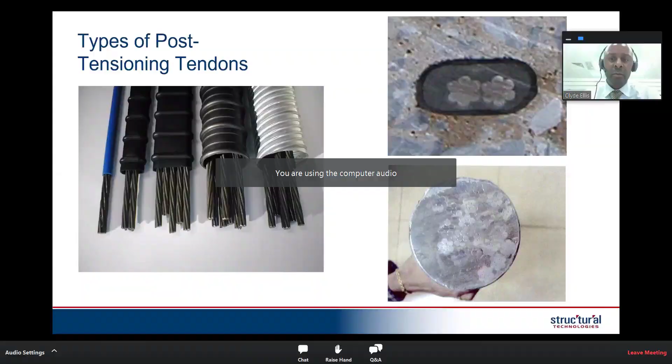In the existing concrete structure, let's talk about some of the repair strategies if your post-tensioning tendon is damaged for whatever reason. In my experience, there are a lot of reasons why your post-tensioning tendons can be damaged.

It could be as a result of impact, fire, corrosion, saw cutting - someone cuts into a slab and they didn't know it was a post-tension slab. Or you can have blowouts that occur perhaps due to green concrete while stressing. And then you can have damage as a result of chipping - someone takes a chipping hammer and chips into the slab and hits a tendon where they otherwise thought there would be no tendon.

Now, when you have this type of damage, there's really three different things that can happen. Actually, there's a fourth thing. Number one, which is not here, is that you can always do nothing, right? If you find that your system or your slab or your beam has enough residual capacity, then there's always the option of doing nothing. Now, if you find that there is a deficiency, then there's a couple of different options.

Let me walk you through those. One of them is detensioning the tendon itself, and I'll talk about how to do that just to create a safe environment where there perhaps is no deficiency. Then I'll talk a little bit about full tendon replacement. While it being very rare, I'm going to walk you through how this is done in a safe manner. And then the last one that I'll talk about is partial tendon replacement.

And you would do this because you have a tendon, for example, that's only damaged in the exterior bay due to environmental conditions, and you don't want to replace the parts of the tendon that are in good condition. So I'm going to talk to you about some of the different tools and techniques that you can use to just replace one part of a tendon if it should be damaged.

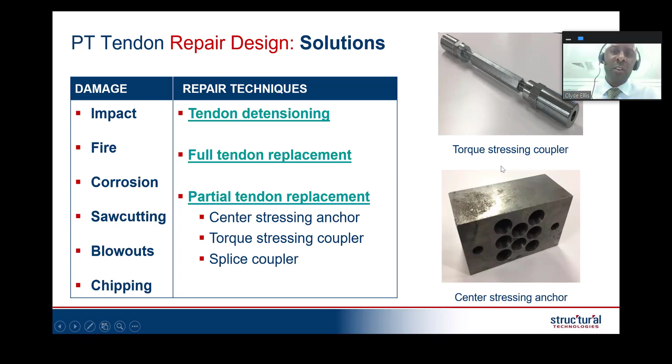And I'm going to use some of the nomenclature or some of the buzzwords from the PT industry about some of these different types of hardware - stressing couplers, torque stressing couplers, center stressing. I'm going to show you how those can be used. So first, let's talk about detensioning a post-tension tendon.

Now, the reason why I want to spend a moment on this is because for post-tensioning tendons, you have a piece of steel that's under high tension. And as a result, it could create an unsafe environment if you have a dramatic release of force.

So to detension the tendon, there's two techniques. One is that you can use a grinder - your standard grinder - and you would cut one wire at a time. This 7-wire strand has 6 smaller wires that are helically wound around the center wire. We call that the king wire. So normally you would cut all of your exterior wires first, and then you would cut the center wire. The concept behind this is that you're gradually releasing the pre-stress force, theoretically 1/7 at a time.

The other way of detensioning a tendon is to use an oxyacetylene torch. This concept is pretty straightforward. Basically, if we take high temperature heat and wave a torch over top of a bare strand, that strand will start to elongate. And while it's elongating, you're slowly reducing the pre-stress force within that tendon.

Now, there's one other point here that's important about detensioning bonded tendons, and it has to do with whether or not the system is fully grouted or not. The reason why I say this is because if you have a tendon that is partially grouted or ungrouted fully due to oversight or poor workmanship, when you go in to cut these tendons, you're going to get a dramatic release of force. And when it comes to doing a repair, you need to understand whether the strands are fully grouted.

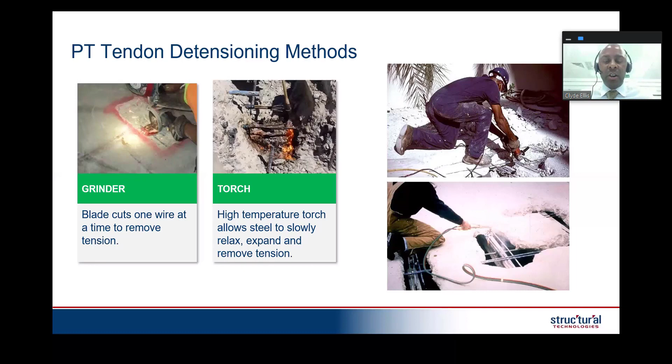So let me talk a little bit about full tendon replacement. Now, as I mentioned on the previous slide, this is something that's pretty rare. In my career, I've only done this twice. However, when it's required, it's really an extreme case, and you need to understand the different steps of doing it.

The solution here was actually to remove the damaged tendons and replace them in the same trench with new tendons. So let me walk through how you would do that. This is a very interesting case study that I wanted to share.

Number one, you would start with shoring the slab. Obviously, when you're going to be removing primary reinforcement, shoring is always going to be required as a first step. Then the next thing you do is create an open trench around the post-tensioning tendon. We know post-tensioning tendons are normally spaced about 1 meter on center, so once you use non-destructive equipment to find those tendons, it's pretty easy to find all the remaining tendons.

Once you open up the slab and chip open the trench, you would remove that corroded tendon. Then in that same space, you would replace it with a new tendon.

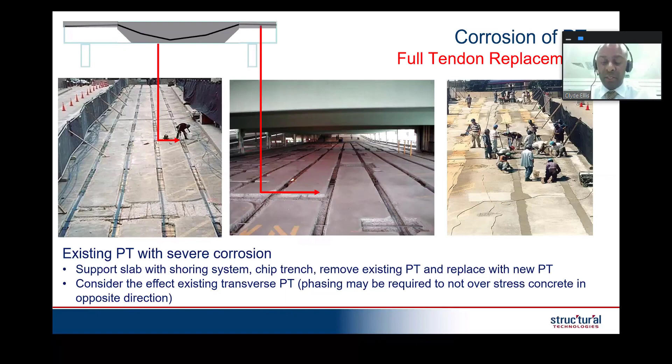Now let's talk a little bit about fire. This graphic might look familiar to most of you who've been in the region for some time. This is a tower that caught fire about 5 years back. There was damage over a 63 floor PT slab, but damage was primarily from the 7th floor to the 56th floor.

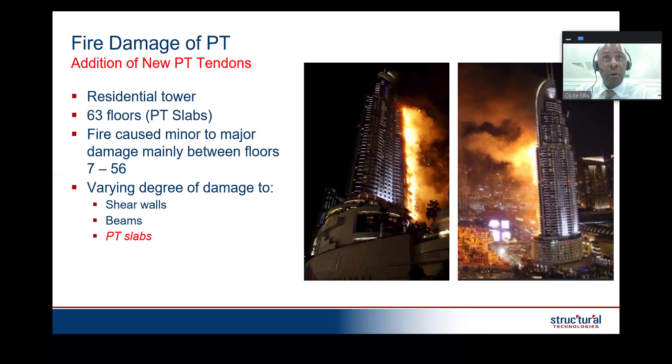There was all kinds of varying degree of damage, to walls, to beams, and to slabs. So what I want to focus on is damage to those slabs and how you would consider the remaining capacity for fire damaged PT tendons.

One thing about PT tendons that we know is that they lose strength faster than rebar. That's for two reasons: one is due to the metallurgy, but secondly, you have 6 wires spun around one single king wire, and because of this interstitial space between the wires, it has a tendency to heat up faster and lose strength prior to that of mild steel at the same temperature.

So when analyzing a fire damaged slab, you have to look at two effects: ultimate strength and serviceability. From an ultimate strength standpoint, we assumed the existing post-tensioning had zero residual capacity, because it's hard to determine exactly the extent of the damage. You probably have 50%, 25% remaining capacity, but there's really no scientific way to determine exactly what that residual capacity is. So to be conservative, when looking at ultimate strength, we assume the existing PT had zero capacity.

Now, from a serviceability standpoint, it's actually a little different. We know that the tendons affected by fire have some effect on the slab, and generally it's not zero. But one thing that's interesting about a PT slab that you have to be mindful of when designing it is that you have to look at the amount of pre-compression and uplift created from the post-tensioning tendons.

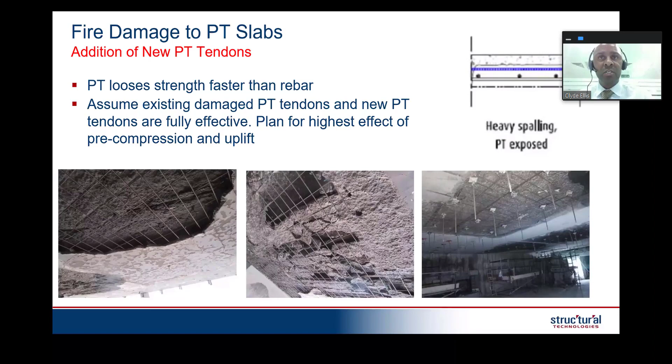This is a really important point to make note of, because in a fire damaged slab, you have to have different considerations whether you're checking strength or service.

Now I have a couple of nice graphics I wanted to share with you that I thought would be quite interesting. When you're working on a damaged slab, most of the damage from a fire is primarily focused on the soffit, since the flames go up. So in order to do a repair, you need to shore the slab. But how can you shore the slab if the fire damage area is directly above you?

So to shore the slab, here in this graphic you see a shoring system from the top of the slab, using this type of framing that has tie rods running through the slab and supporting it, with the reaction going back to the surrounding walls. This is one way of shoring the slab from the top.

Below that, you see where there's a new trench put in for the new PT. Basically, we left the fire damaged PT in place, created new trenches, and profiled the tendon in those trenches. To the far right, you have the stressing end, which we call the stress pocket in the US, or here we call it a pan box. Just below that is the dead end, the non-stressing end of the new post-tensioning tendon. This gives you a concept of how you would deal with the tendons and implement the repair.

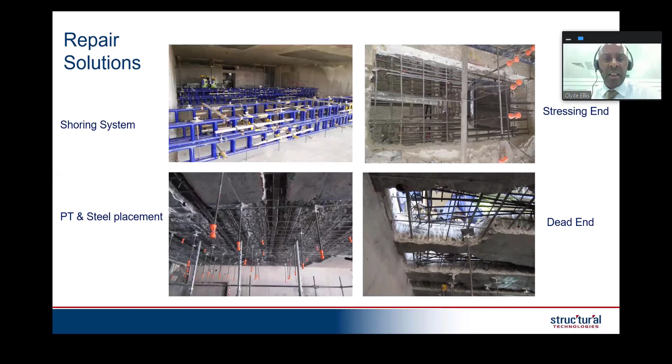Now let's talk about another technique using a torque stressing coupler.

In this graphic on the far left, you see an overhead bridge crossing a road below. This was taken on a project in Florida, South Florida, on the Florida Turnpike, if you're familiar with that. During the mid-2000s, there was a lot of construction in South Florida, with construction vehicles running up and down the turnpike. From time to time, the equipment on the flatbed trailer was taller than the maximum height allowed under the bridge, and when that happens, you get damage to the overpass, primarily focused on the fascia girder, the exterior-most element of the bridge above.

So what you see here is a bridge that's been damaged by an over height vehicle. This is an AASHTO beam, or a pre-stressed beam, and you see several wires that were broken. So the question is, what do you do? Do you replace the beam, or do you try to fix it in place? Let's talk about how you would try to fix it in place.

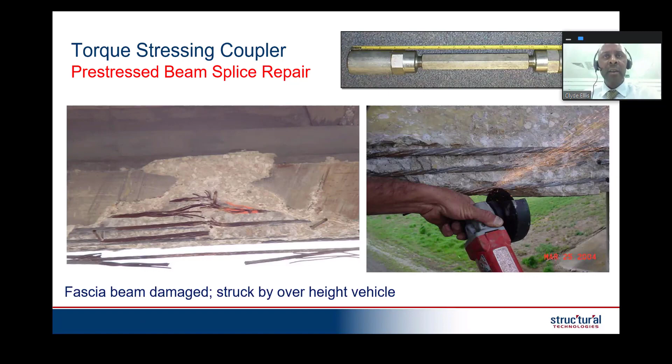The first step is any strands that are hit from the impact, we would cut those out. Why? Because when you connect onto a new piece of strand, you need to have a good piece of strand to grab hold of. You don't want it to be frayed or yielded.

If you look at the graphic on the left, this is a splice chuck. The splice chuck is added to the end of the strand where it was just cut, and then you use the torque stressing coupler. This torque stressing coupler is connected to another piece of strand on the opposite side of the repair. So imagine I have a strand of a certain length, and I cut the damaged section out — I have a little nub on the left and a little nub on the right, and between those two I'm using these two pieces of hardware.

To actually stress that assembly, you would use a torque wrench on a bar, and then torque it. What it does is take these two couplers and pull them together. So the net effect is pre-stressing the unbonded section of the damaged strand.

The other thing to consider when splicing strands like this is that if you have more than one strand damaged in a certain location, you may need to stagger these couplers because the diameter of the hardware might be a little bigger than the spacing of your pre-stressing strand. So sometimes staggering of the hardware is required.

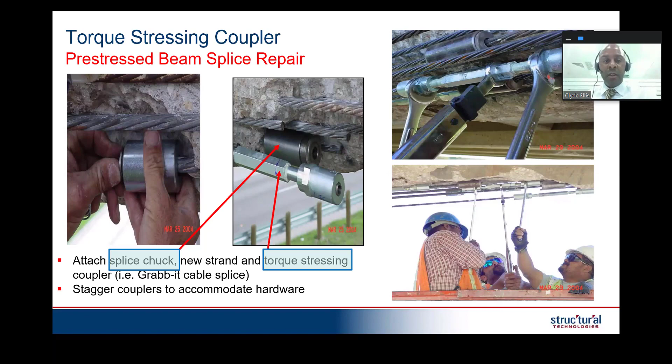Now, if you remember earlier, I talked about sometimes you have damage to a tendon but it only happens in the exterior bay. You may ask why that would happen. Well, if you have a post-tension slab that's partially below grade, depending on the protection details at the end anchorage, you may have infiltration of water or contaminants that lead to corrosion. The graphic here is an example of a slab where contaminants have gotten into the post-tensioning tendon and corrosion has started to take place.

And this corrosion is sort of like cancer, it kind of spreads over time. So if this should happen, there's a couple ways to deal with it, but what I'm going to be talking about is partial tendon replacement.

So what you would do, step one, is lock off the post-tensioning tendon. I'm going to describe how you do that and what that term is. But the basic concept, for the sake of this slide, is that we're going to create an anchor at a portion of the tendon that is otherwise unaffected.

That's step one. The second step, and this graphic at the top right is a really good photo of it, is that I would chip open the slab and remove those damaged tendons. In this graphic, you see it's full depth from end to end. Then I would put in a new post-tensioning tendon and pour that back. Now, prior to pouring it back, I would have to put in a coupler.

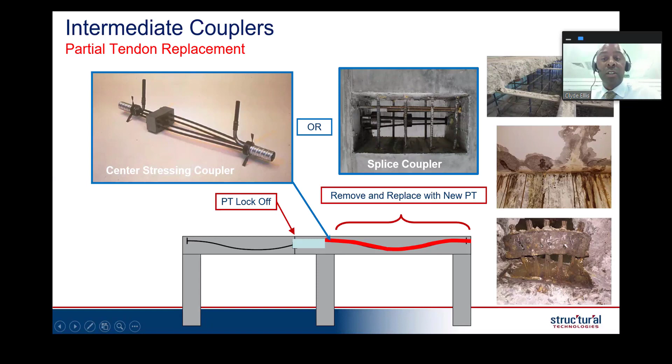So when it comes to damaging tendons, sometimes this damage is localized and it may not require any remedial action. Concrete screws, cutting, coring, chipping - sometimes the effect is minimal and no repair is required. And in order for that to be the case, the tendon has to be fully grouted. As I get further into this, I'm going to talk about whether the tendon is grouted or not, because if it is, your repair could be slightly modified.

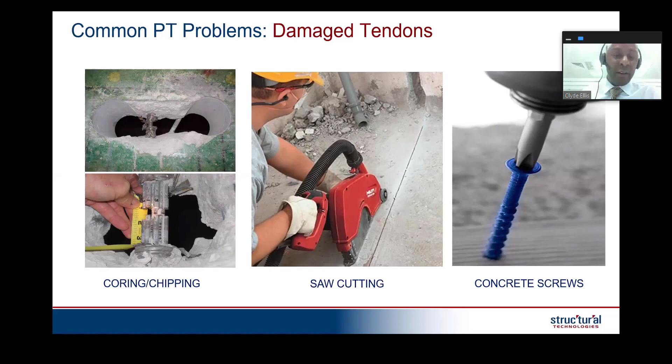Now, another piece of damage that can happen on a PT slab - and I'd say this typically happens when it comes to bonded post-tensioning during new construction, rarely over time - is what we call tendon blowouts. These blowouts occur at the anchor itself. A blowout can happen for a couple of different reasons: you could have bursting reinforcement that's either undersized or mislocated, you can also have low compressive strength, or you may have poor concrete consolidation in the anchor itself.

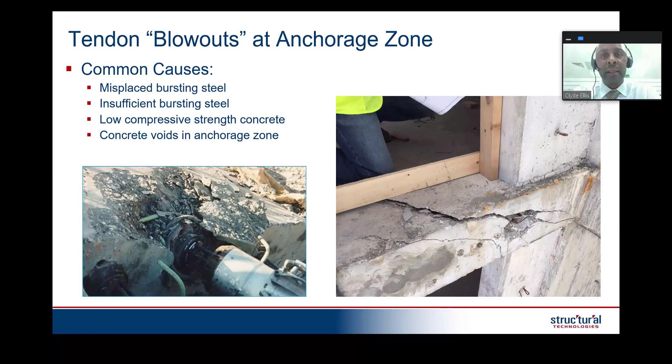In my experience, what I've seen the most is actually low concrete compressive strength. That seems to be - if I had to rank these four reasons - I would say low strength probably leads all the other remaining reasons for a blowout.

Now, if you have a blowout, what do you do? You're not going to demo your slab and start over, you're going to have a local repair. So typically you would come in and de-stress the tendon because there could be some residual pre-stress force - remember, you would use either a saw or a torch to release that pre-stressing. And then you would chip open the concrete and place new hardware.

You place your bursting steel, you place any grout accessories that are required, bearing plate, anchor head, etc. And then you would pour back concrete with a high strength repair mortar. Typically you want to have a high early strength on this because when it comes to repairs, sometimes it affects the progress of the remaining construction schedule. So high early strength is important.

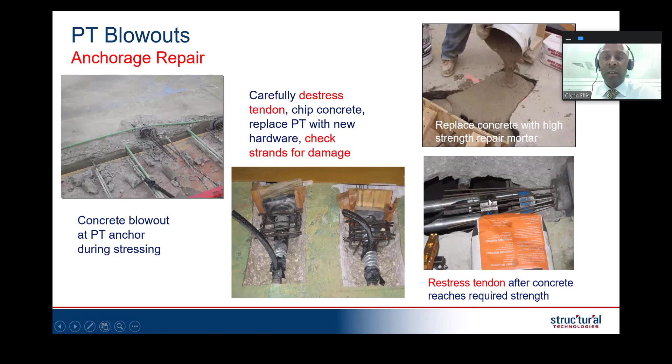And then after the concrete hardens, you would stress these tendons using either a monostrand or a multi-strand hydraulic jack. So next I wanted to shift a little bit into modifying a slab for various reasons, but I'm going to focus primarily on openings and penetrations that weren't planned from the original construction.

When it comes to modifying slabs, I like to break the openings into two categories: small openings, which in my opinion is 2 feet by 2 feet or smaller—in metric, maybe 600mm or less—or larger openings. There are a lot of different reasons for having these different openings.

It could be for mechanical, electrical, plumbing, staircases, or elevator shafts for larger openings. The point I want to make is that you can always modify a post-tension slab, whether the tendons are grouted or ungrouted. There's always a way to do it. You just have to have a contractor with repair experience, and understand the behavior of your slab.

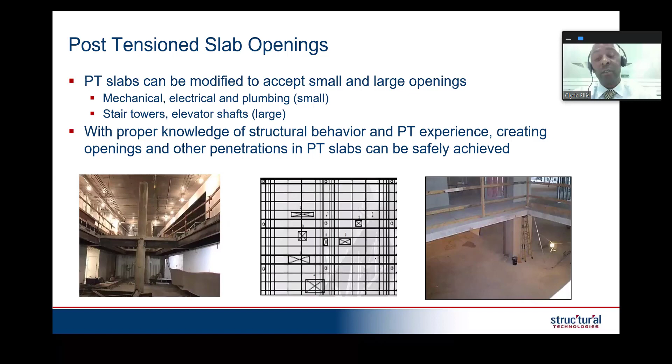So let's talk about how you deal with small openings and how you accommodate them. The first step is to use non-destructive testing equipment to find the tendons in the concrete slab. That's typically done either using ground penetration radar equipment, which I'll talk about in the coming section, or you can use an X-ray to identify where those tendons are.

Once you find those tendons, in many cases you can shift your openings to the left or right just enough to avoid the PT tendon. This graphic in the center here is an example of that. The blue lines represent the tendon, and you would just shift your core a little to the left or right to avoid those tendons. So for small openings, I would say this would be the preferred technique.

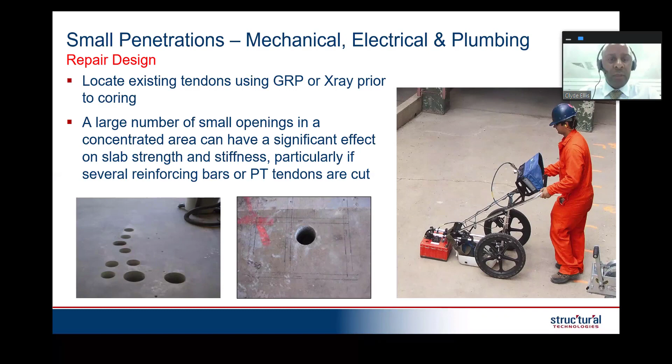Now, if you hit the tendon, then you need to look at the residual effect in the slab, and I'll talk more about how you would do that. So if you hit a tendon, or if you have a lot of tendons affected by large openings, there's a couple things to consider.

One is the possibility of shifting it. When I say shifting it, I normally like to think of putting openings in the middle third of the slab. Normally the middle third of the slab is going to be the area with the least amount of impact to the overall structure. As that opening gets closer to your column strip or columns, you have to consider other effects—maybe not bending, but you may also have to consider punching. So shifting them is always step number one.

Step number two is checking serviceability requirements. After you lock off these tendons around the opening, you would check your service requirements, and then check the remaining capacity of your slab. What's interesting about this concept is that if you create large openings, your adjacent bay actually becomes an end bay. And we know from a design standpoint that the bending moment will then increase, so that also has to be considered.

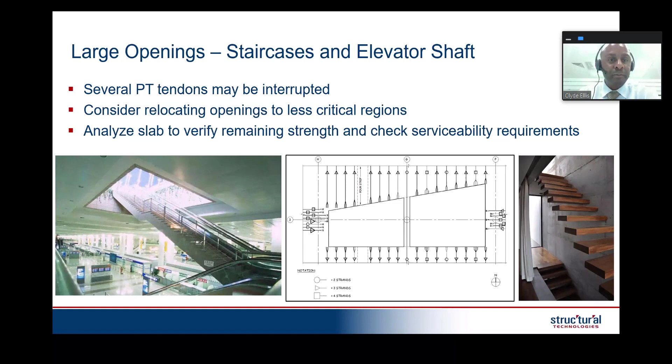The strengthening isn't always required around the opening. In some cases, it may actually be the backspan, which goes from a continuous span to an end span, and the moment increases. Now I've talked a little about locking off tendons, let me get into more detail about how you do it and why you would need to.

Typically, if you're creating large openings, you may want to lock off the post-tensioning tendons around that opening. The reason I say 'may' is because if that tendon is fully grouted, then theoretically the pre-stress strand will redevelop in that slab, and you only have to deal with the localized effect. However, if you have uncertainty about the quality of grout, then tendon lock-off may be required.

Now, how do you do that? First, you would chip into the slab to create an opening and expose your PT tendon. Then you would peel back the duct, similar to this second graphic here. Then you would use a chisel to remove the grout off the strand. The net effect is you want bare strands, which you clean with a wire brush, as shown in this graphic in the middle.

Next, you would mix a 2-part epoxy mortar and fill that pocket with the epoxy mortar. Once it hardens, you've locked off the tendon.

Let me explain what's mechanically happening here when we say lock off. The epoxy anchor that's created has load being transferred due to side adhesion, but it's also being transferred through end bearing. The combination of these two creates an anchorage, or otherwise a lock-off, of the post-tensioning tendon.

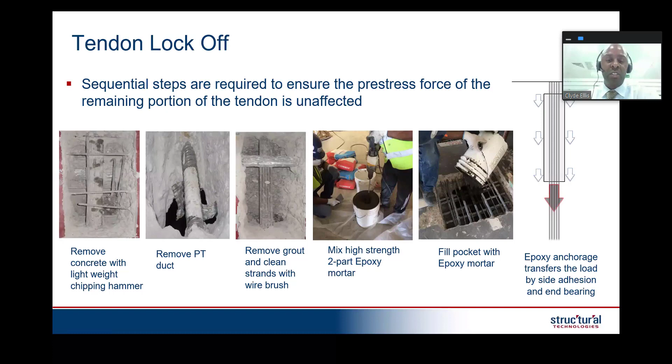So now I want to talk a little bit about some of the tools to assess the PT slab. And whenever you do an investigation of a slab, there are really 3 basic steps that you would take.

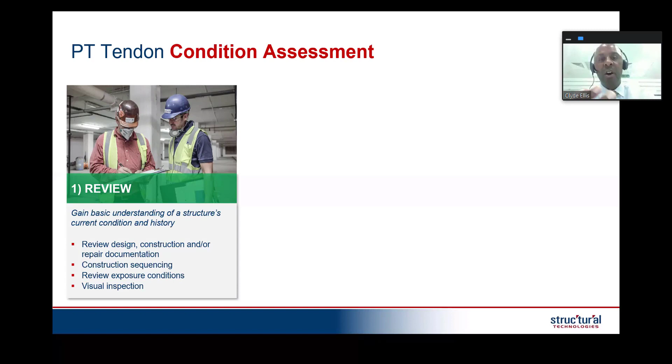First is that you would review all relevant documents. We always say that having as-built drawings is great to have, along with stressing records, grouting logs, and doing visual inspection. All of these would be done in what I call the upfront initial review.

Now, the second thing of doing an assessment is it might require some field testing. I'll walk you through some of the tools that you can use to understand the performance of the PT.

And then lastly could be laboratory testing. In my experience, laboratory testing is quite rare. However, for special cases, you may need to take coupons of your strand and actually send it to a laboratory, either to do chemical testing, or you may have to do some tension pull tests.

Now, before I get into the different techniques, let me explain why you would do this assessment. In many cases, when an owner buys an existing building, one of the things that always happens is he hires a consultant, like many of you are on the call, and says, I want to understand the condition of my structure. And the default action is structural assessment, understanding existing conditions, the load path, load diagrams, and checking members to ensure they're adequately designed for those loads.

But one thing that's often overlooked in my experience is understanding the durability side of your structure. I'll talk a little bit about ways you can do a durability check, but focus on the post-tensioning tendon.

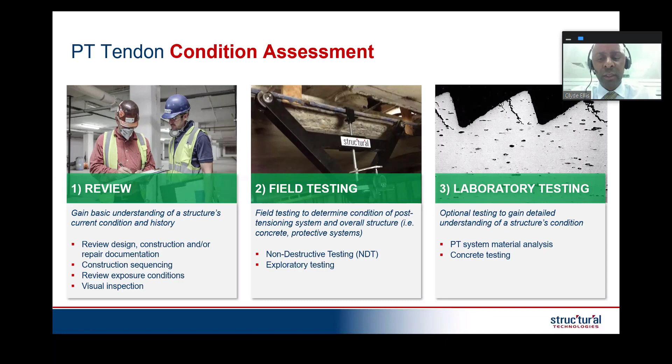So if you're doing a durability check on your post-tensioning tendon, you start with the visual inspection. The first thing that we always do is go to areas where you would expect distress, having full knowledge of how a post-tensioning system behaves.

So one, you would look at the high and low points. The reason I say that is because that is where the contaminants have the shortest distance to get to the pre-stressing strand. I would also look at the anchorage zones.

If I have a pour back that's improperly done, or if I have poor detailing at the perimeter of the building, this could be an area of distress. Any part that's below grade, I would always check there because of the possibility of contaminants coming through or leaching through the wall.

I would look for cracks, spalls, efflorescence, and rust staining. Anywhere that there's a water feature above the building, I would look directly below that. That's a good place where there could be some challenges if the waterproofing has failed.

If you have exposed strands or ducts or tendon failures, or even previous repairs, whenever we're doing a visual inspection, it's really easy to just look at those areas that were patched before. If it was not a good patch, then that tendon in that patch could be in serious distress.

And then the last part is excessive deflection. So these are things that I would do in step one when I'm doing a visual inspection of a structure, just to kind of understand the health of the post-tensioning tendon.

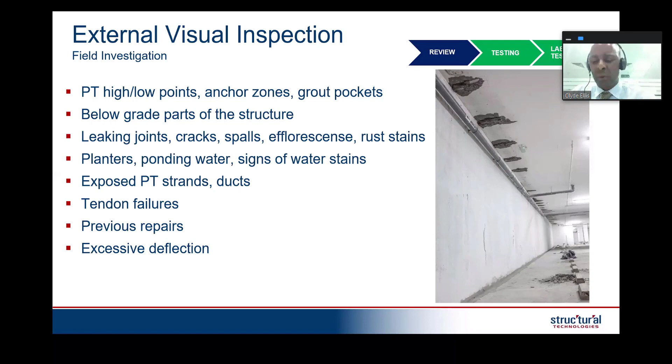Now, when I prepared this list, I would say the focus on this part of the industry really came about probably in the last 10 years. This list, we populated based on existing technology and new technology.

Now, when it comes to doing an investigation, I just want to make one caveat here. You would never use all of these techniques. Never in my career have I used all these techniques. What you have to do is understand the pros and cons of each technique.

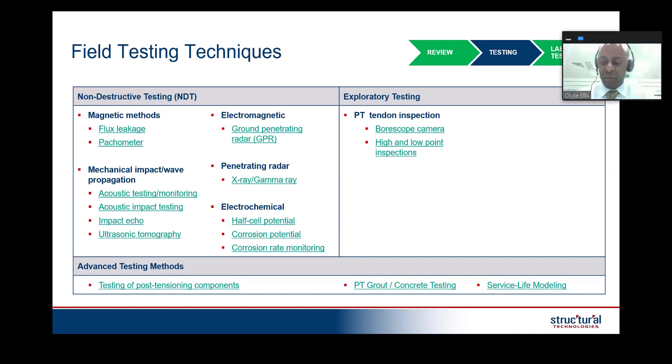Because there is no single non-destructive test equipment that will give you the full picture. It does not exist. So what you have to do is pick and choose different techniques to help you understand the health of your structure. Okay, so let me walk you through some of the techniques that I've seen used in my experience.

The first technique is borescope camera inspection. I always start with this one because it lets you visually see the condition of the strand and the quality of the grout, or the presence or lack of grout. To perform this inspection, you drill a small hole, about 25 mm max bit size, using a special bit with a depth indicator on the drill. You combine your as-built drawings, set the depth indicator, and drill a small hole into the slab, wall, or beam.

Next, you insert a borescope camera, the same type used in the medical field, just much smaller there. The concept is the same: a tiny camera on the end of a wand with articulating capability, able to spin left, right, upside down, and around.

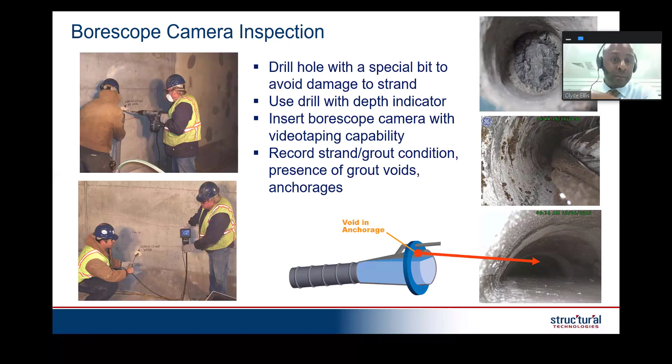The next technique is X-ray. I really like X-ray for this same reason: it tells you exactly what's in the slab, again with no interpretation required. However, it comes with a few limitations.

Number one, an X-ray requires a radioactive isotope. Imagine going into an X-ray room at a hospital, turning on the switch, and just standing there for hours—that's a bad idea. So you have to maintain a certain distance from the radioactive isotope when exposing it to the film. There's a safety issue. It also uses bulky equipment, probably about the size of a small refrigerator you might have had in a college dorm.

On top of that, the viewing area is limited to the size of the film. In my experience, I've seen maybe 600 mm by 600 mm as the maximum film size in a single shot. So if you need to X-ray a large area, it could take days, even weeks, to get the full picture using this technique.

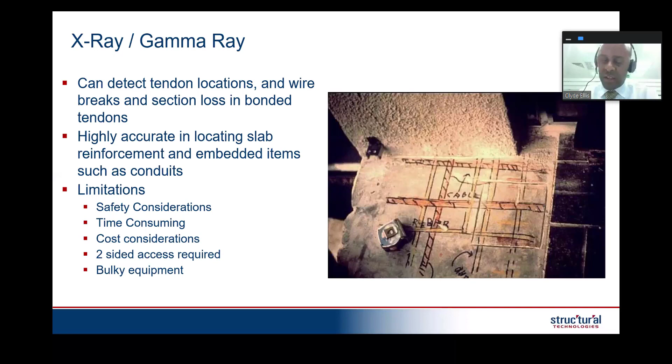Another technology that's come about in the last 5 years or so is magnetic flux leakage. I actually had a professor from graduate school approach me about this technology—it's really good from a science perspective, but it has some limitations. Let me walk you through how it's used.

It's really cool technology. We know pre-stressing strand, the steel wires, is ferromagnetic material. That means I can magnetize the steel to saturation. If you remember physics, when you magnetize steel it creates a magnetic field, which we call magnetic flux. The basic concept is that the magnetic flux is proportional to the cross-sectional area of the steel.

So what does that mean? If I take a sensor and pass it across a tendon that's fully magnetized, I can use that sensor to measure the change in the magnetic field. If there's a drop in the magnetic field, that tells me there's a point of smaller cross-section at that location, signifying a defect. This technology is really cool—I've seen it used on bridges and in some building applications, but it all comes down to creating a magnetic field, magnetizing the strand, and checking for a change in that field.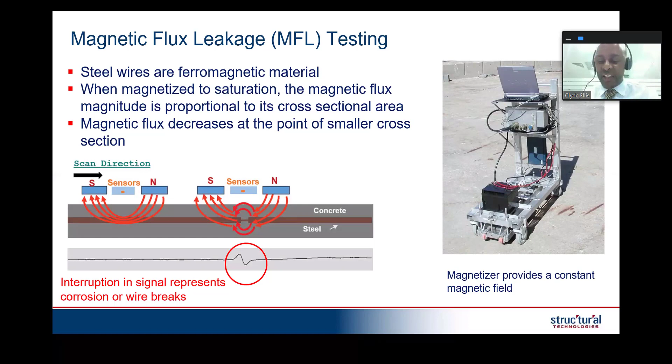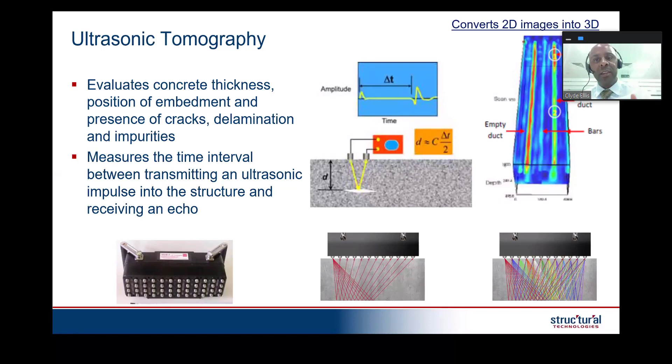This graphic on the right shows a tendon that's fully grouted, represented by green, and the red represents a void within that specific tendon. The reason you'd do this is because you're trying to find a quick, non-destructive way of finding problems without making Swiss cheese out of your slab by drilling a bunch of holes or doing a lot of chipping.

Now, the last technique I wanted to talk about is acoustic monitoring, which is a really interesting technology. If you're like me in graduate school, you work with a lot of different sensors, like displacement transducers, string pots, rotation meters, accelerometers, and so forth. I remember this from my grad school days, and I wanted to show you how this accelerometer can be used to detect wire breaks.

For wire breaks, if a strand is pulled under tension, there's a lot of energy stored in that strand. If a wire breaks, or the whole 7-wire strand breaks, you release a lot of stored energy. When that happens, two things happen to that energy: one, it's reabsorbed into the surrounding concrete, or two, it creates an acoustical sound or vibration into the slab. So if you have accelerometers on your slab in strategic locations, they can actually detect the acoustic waves in the form of surface vibrations, and it can help us triangulate exactly where the wire break occurred.

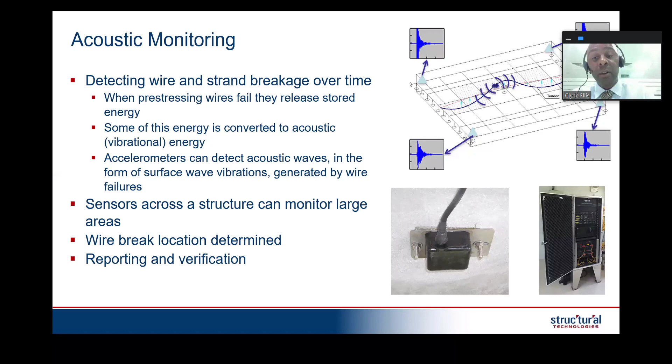It's a really cool technology. I've seen this used on stay cable bridges, on historic buildings, and for long-term owners who have had problems and want to get a handle on the possibility of future problems before it becomes a safety hazard.

Okay, so the last topic I wanted to talk about is PT grouting defects. I want to talk a little bit about how it happens, and then what do you do if it happens. To introduce this topic, first I want to talk about how you grout a post-tensioning tendon, and the mix design. Typically, the mix design consists of cement and water, with a water-to-cement ratio normally around 0.45.

Normally, for a post-tensioning tendon, you'd pump grout from one end of the tendon to the other. On my screen, this blue line represents a draped tendon. When you do pressure grouting, you have to have an inlet and an outlet, and depending on the amount of drape, you may have high point vents. If this were a slab, I would mix grout and start injecting here, and that grout would go down to the bottom, then up to the top at the high point.

When that grout reaches the high point, it rushes down to the bottom of the next span, and then it slowly starts to backfill, backfilling to the left, backfilling, backfilling. What happens here is that air gets trapped within that duct about 1 meter downstream of the high point. We've seen this in a lot of different cases.

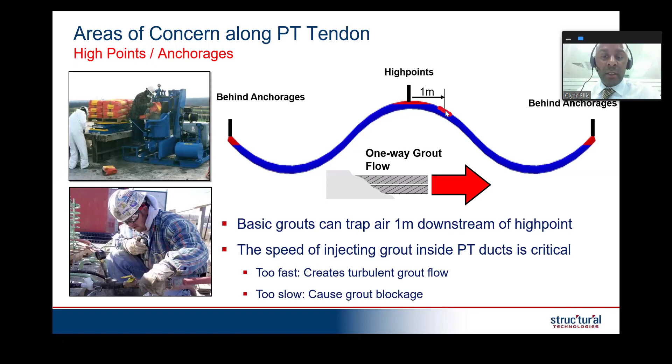The other thing I want to talk about that leads to trapped air or voids is the grout material actually segregating, and let me explain how that may happen. If you see this graphic, this is an inclined tube test done in a laboratory. This is a draped tendon, basically simulating a tendon that has a low point on the slab and a high point at the top of the tube. I'd say this has quite a bit of drape, but it makes the point I'm trying to highlight here. What we found is that for basic grouts, the grout material has a tendency to segregate. What I mean by segregate, it starts to return back to its separate constituents, so the cement can separate from any admixtures. This graphic you see on the top right is an example of segregation.

This murky water you see at the top, this is what we call bleed water. How does bleed water happen, where does that come from? Well, just imagine a vertical column of grout. We know that there's head pressure, the taller the column, the more head pressure. What we have found is that the grout is heavier density, and it's actually pushing down on itself, and the bleed water is rising to the top. So this is how that segregation happens. It's not because they didn't mix it properly, it's not because they put too much admixtures. It's actually that the head pressure causes the grout to segregate, and bleed water is left at the top.

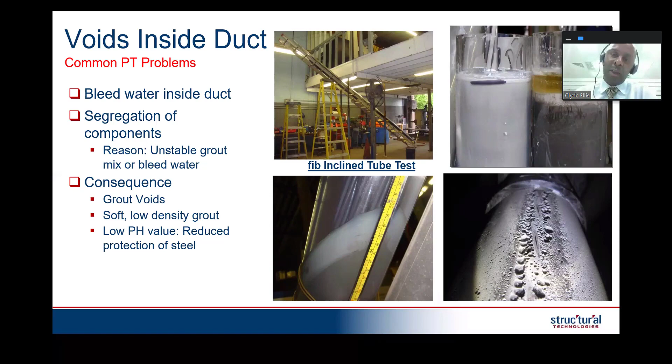So the point I'm trying to make here is that bleed water, which can remain in a duct or reabsorb into the grout, can lead to voids inside the duct or poor quality grout that can create a path for contaminants to get to your pre-stressing steel. And we know when contaminants get to our steel, what happens? We have corrosion, and that leads to other problems.

Let me walk you through a quick case study to share this with you, because when I talk to consultants about this issue, they say, okay Clyde, that's a field problem, I'm not a field guy, I'm going to hire the PT guy, he's going to do a good job, finish, no problem. I say, okay, we can assume that works.

However, if you're asked by the owner, or if you recommend to the owner, hey, you're buying this building, you're doing a tenant conversion, or you're buying an abandoned building and putting another 20 floors on top, hey Mr. Owner, does it make sense to do a durability check on your slab that could include PT investigation? And if the answer is yes, let me share with you what would be a process you can use if that's your task.

So this case study is a residential tower on Al Reem Island. The B2 level is a raft slab, conventional rebar, which is pretty common. All of the remaining floors are post-tension slabs. I want to highlight that parts of the slab are below grade, which is the root cause to the problems I'm going to share with you.

But I'm going to focus primarily on what a consultant does, how you start, where you go. Some of the observations in this particular structure is that there were cracks in the slab due to restraint, there was spalling, PT in different areas was either exposed or highly corroded. We actually even saw some empty ducts, which was quite a surprise.

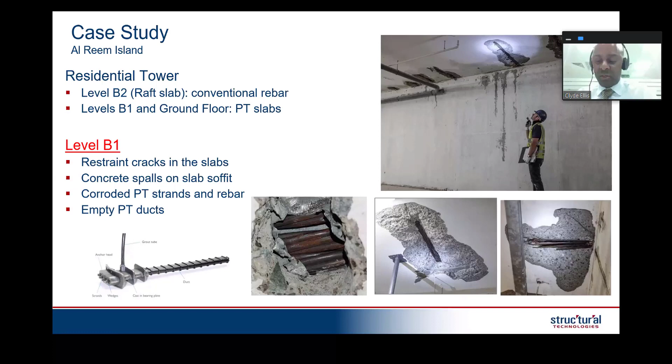So, investigation. You're the consultant on the job, where do you start? As I pointed out earlier, tier one, or step one, is always understanding the structure, doing a visual, and then combined with that you do some non-destructive testing. What's the non-destructive testing? That's hammer sounding, right? We can use acoustical hammer sounding to find areas of delamination. Age-old technology, been around forever.

You can also use ultrasonic pulse velocity, which I showed you earlier, to help detect areas where there's medium to large size voids. I wanted to highlight that small voids with that technology is one of the limitations. However, for medium to large, ultrasonic pulse velocity is a good technique. So that's step one, and you've done that.

Okay, so you collect your data, and then you say, hey, there's some other areas I want to go a little bit deeper. This is just preliminary, let me go a little bit deeper to understand really what's the health of my structure. So tier two is when you would do what I call semi-destructive testing or minimally invasive testing. So what would you do?

GPR is a really good tool, right, can help us identify defects within the slab. The borescope camera inspection, to me, it's a go-to technique. It's inexpensive and it tells you a lot of information, and you don't have to be a scientist to interpret the results. You could take some cores, right? You can also do some chemical analysis of the cores and the PT grout.

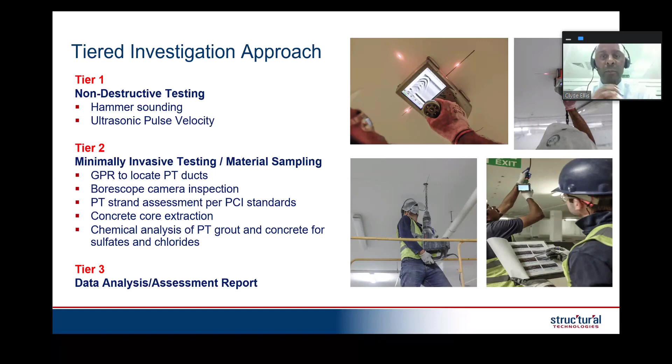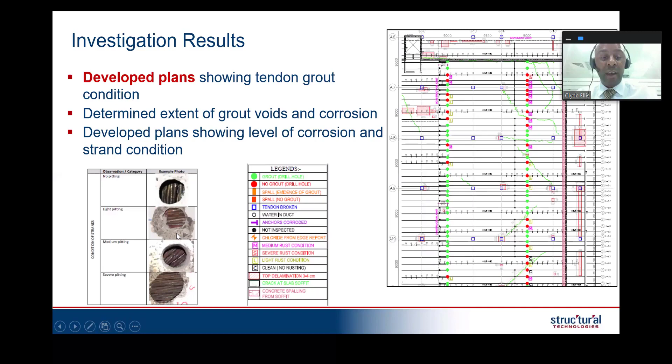This is a really good document to prepare for a tender package because it paints a clear picture to the contractor of what the problems are and the extent of the problems. Additionally, in your report, you would have a summary of your visual findings, shown in the graphic on the far left-hand side. That would be your report.

But when it comes to repair, I always like to explain a little bit further for consultants, because if you're going to have a good contractor, you should have some peripheral knowledge of what's going on, what he does, and how he's fixing it. Just as a logic, sound check, if you will.

So if you have severe corrosion, remember earlier I said you can do partial tendon replacement - chipping open the trench, taking out the bad PT, putting in the new one, finished. However, another technique I've seen used is to lock it off just like explained before, but then convert that slab into a conventionally reinforced slab. That's always an option. In some cases it may be easier because you don't have to consider the effect of stressing a tendon and having proper access to stress it. So think of this as a technique: I can take out the bad tendon and simply replace it with a mild steel reinforced concrete slab.

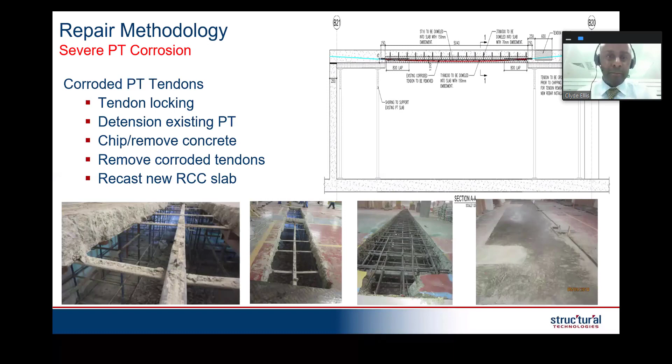Now, when it comes to grouting voids, there's a couple of different techniques I wanted to share with you, just to give you a little bit more knowledge into the contractor world. There's a couple of different techniques for filling voids. I would say primarily there's two, just to make it plain.

One is pressure grouting. What's pressure grouting? The same technique that's used to grout the tendons from day one. You have an inlet, you have an outlet, you pump material from A, it comes out at B. You keep pumping until the material coming out of B is smooth, free-flowing, without any lumps. Shut off your valves, finished.

But there's another technique called vacuum-assisted grouting, and I'm going to talk about that on the next slide. Whenever either of these methods are used, there are standards that I want to share with you that are a good resource for having a deeper understanding into these techniques and how they may be applied.

The Post-Tensioning Institute, based out of the U.S., has a really good document on grouting, and I would recommend it as a reference. In all these graphics that you see here, this shows you different stages of remedial grouting, where you're installing new grout ports, mixing equipment, connecting your hoses, and making sure you have good flow out the other hoses.

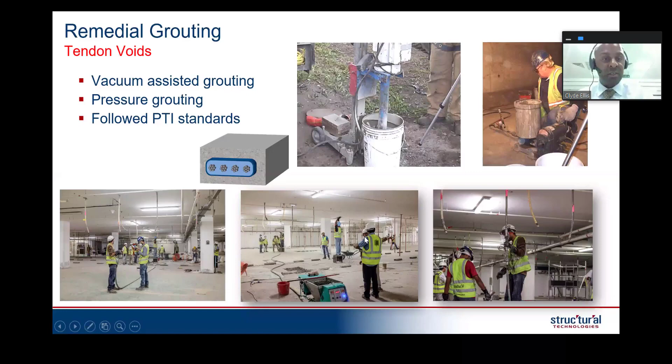Now I want to talk just briefly - this is my second to last slide, just to give you a sense of a time check here. Remedial grouting using the vacuum-assisted grouting technique. Let me explain why I would want to use a vacuum to help me fill a void inside of a duct cast in concrete.

Number one, these voids can be quite small. Imagine a round duct, let's say 75mm or 100mm inside of a beam. A flat duct, you're talking about 1 inch by 3 inch, so that's 25 by 75mm. So a flat duct, the void would be small - the duct is already small. So if you have voids inside these ducts, sometimes it's difficult to push new grout material through the small space inside the duct, and you could build a lot of pressure trying to do that.

So the concept here - and this graphic is worth 1,000 words - is to use a vacuum to help you with the grouting. Imagine you have this beam here, this tendon represents a beam or a slab. I have a grout pump on the far right, using positive pressure to fill that tendon full of grout. On the other side of the tendon, I hook up a vacuum pump, and the basic concept is the vacuum creates negative pressure.

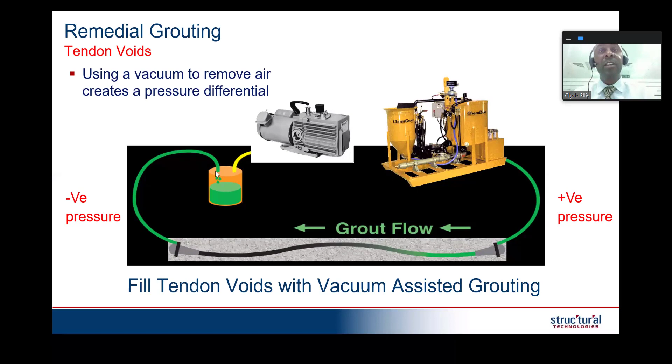If a tendon is completely voided, pressure grouting is definitely the way to go.

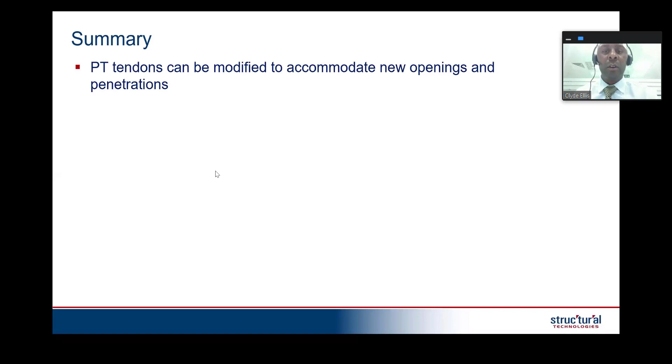So in summary, putting all of these four or five segments together: number one, PT tendons can be modified to accommodate openings and penetrations. While that might seem obvious in certain industries, there's sometimes aversion or apprehension about using post-tensioning in certain structures because a tendon is inside concrete, stressed, and if it breaks, what happens? If I'm in a hospital and a tendon breaks during surgery, it could be a disaster. So sometimes owners believe I can't modify a PT slab, I've got all these tendons one meter on center with an orthogonal grid, where do I go, there's no place to cut. But the answer is yes, you can modify any slab for openings or penetrations of any size.

Thirdly, PT tendons can blow out or fail if they're partially or fully ungrouted. How can that be? Again, the corrosion protection is gone, contaminants get to the strand, and for that unbonded or partially grouted section of tendon, when it releases, it's like cutting a rubber band. The force will release and it could cause damage in the immediate area.

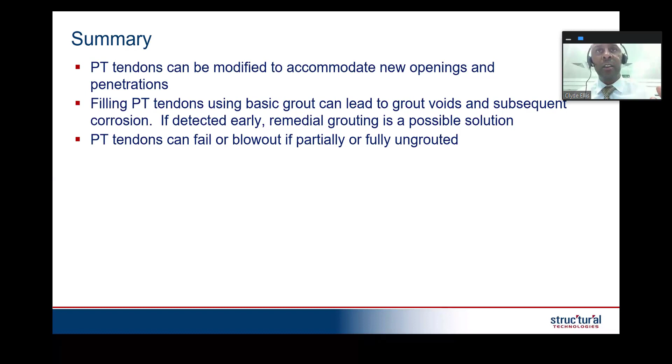Fourth, there's no single NDT method that can accurately assess PT tendons. I'm telling you that with experience. There's no smoking gun that can take care of all cases with high precision. All pieces of equipment have pros and cons, advantages and limitations. But using a combination of different techniques can give you a good health check of your post-tensioning.

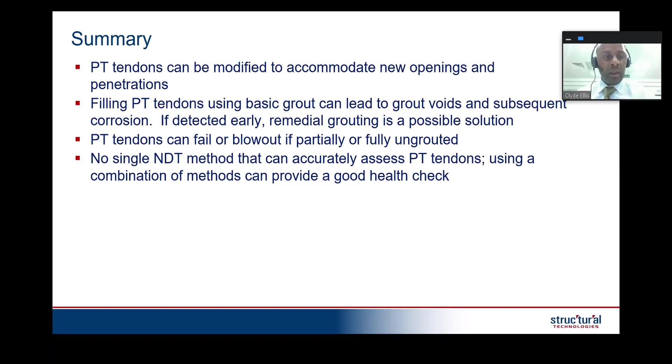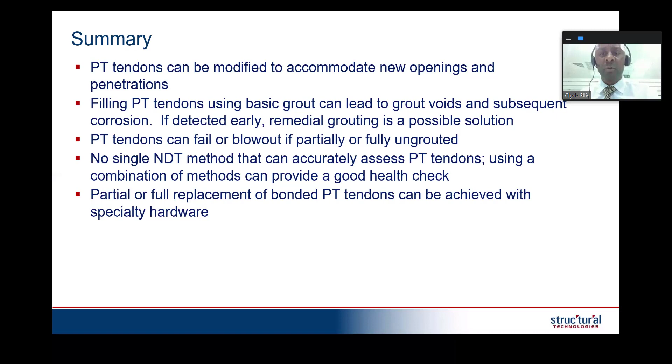Next, partial or full replacement of bonded tendons can be achieved with specialty hardware. I showed you some of those different gadgets, stressing couplers, different types of hardware that allow you to connect tendons together. Different manufacturers have different systems, but generally they all work the same when it comes to coupling strands together. And the last comment is that an experienced designer and a good quality repair contractor is required to have a successful PT modification or repair project.

One thing I've learned in my 20 years being involved with post-tension concrete is that there's not a lot of repair guidelines, specifications, manuals, or books on how to modify PT structures. And if you have to do it, when do you do it, when do you not do it? It's still a bit of a black box, that's the point I'm trying to make.

The Post-Tensioning Institute is trying to develop some guidelines for this field. I'd say a lot of experience has come through years with PT subcontractors. However, as consultants, I think you have a responsibility to have some knowledge of what's practical and what's not. It's good to have some knowledge about different tools for assessment, because not all structures can be checked with structural analysis alone - sometimes durability assessment is also required.